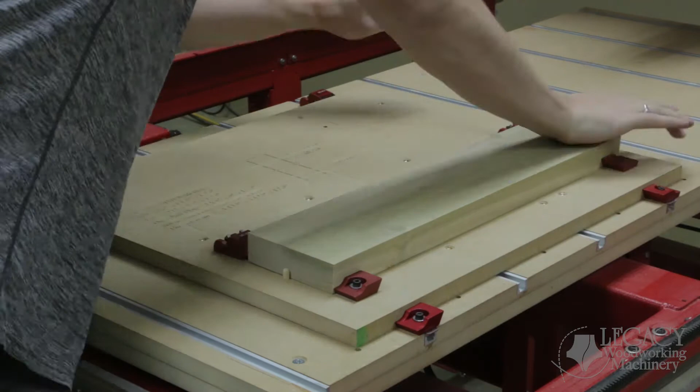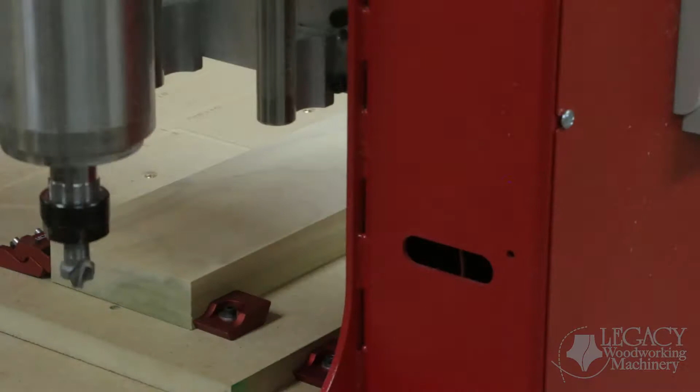Now let's get back to the good stuff, starting with producing the legs. All the blanks, including the legs, are secured in the machine with a storyboard fixture table. This simplifies the setup procedure and makes it easier to reproduce this project at any time. The precision of the CNC will ensure the pin alignment holes are perfect for flipping the parts over. On the second side, we round over the edges and then cut the leg out. This double-sided technique completely eliminates the need for a router table and other shop tools.

Everything is machined on the CNC, including the dovetail joinery. To machine the sliding dovetail joinery, the leg is mounted to the vertical table. This standard feature of the Maverick CNC eliminates the need for secondary tools and difficult setups when machining on the ends or edges of the parts.

Next, let's take a look at how easy it is to machine the threaded shaft using the turning center. This part is programmed using Legacy's conversational cam turning software. Once the part is turned round, we use the same surface planing bit available from magnate.net to turn the round tenon. In the rapid-fire adjustable stool seat video, you'll see how we machine the matching round mortise in the bottom of the seat. To machine the threads, we used a 90-degree V-bit and programmed 4 threads per inch to match the threaded nuts.

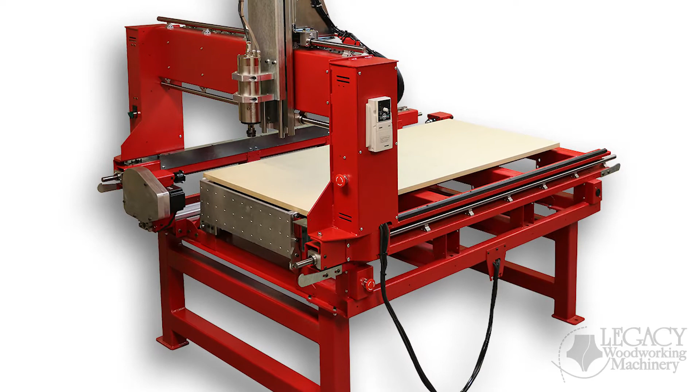The Maverick CNC features 3 independent workstations. This allows you to quickly and easily produce repeatable complex components like the legs and the threaded shaft for the adjustable stool. Make sure to check out the other rapid-fire videos for this adjustable stool to see how to carve the seat and machine the threaded nuts, including the dovetail joinery to complete this project.

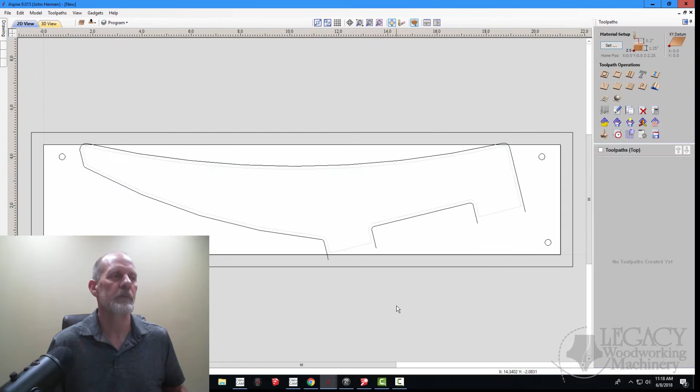We used Vectric's Aspire CAD CAM software to program the legs, threaded nuts, and the carved seat. Aspire allows you to easily program double-sided parts, as you can see here.

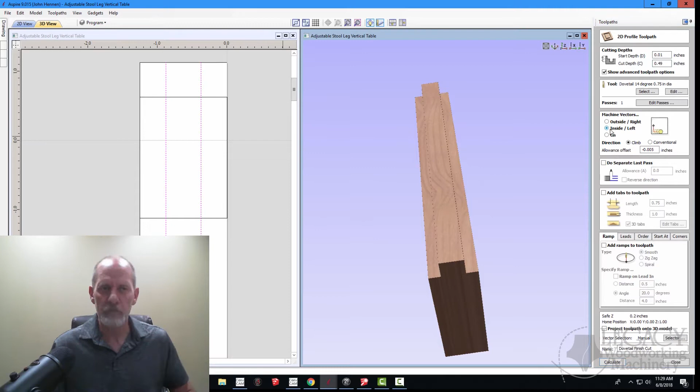We also used Legacy's conversational cam turning software to program the threaded shaft and the matching internal threads for the nuts. In CNC workshops across the country, we demonstrate how to program the parts, and then you'll get a chance to see the machines in action.